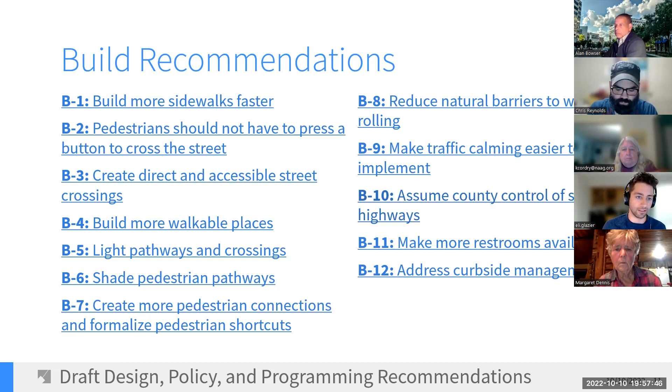So I think it's a good government measure, and it would really improve our ability to be responsive as a county to improving pedestrian safety in these areas. So I'm going to keep going, we can definitely talk about that later.

The maintain recommendations, MA1, is about being more proactive about fixing sidewalks, creating a county-wide sidewalk inspection and repair approach that proactively assesses sidewalks across the county on a rotating basis and then improves and repairs them based on the assessment findings. Being more proactive will help the county repair sidewalks before they deteriorate, allowing for cheaper repairs over time and a better pedestrian experience countywide.

MA2 is about a suite of recommendations for improving how our sidewalks are kept clear of snow, trash receptacles, overgrowth, and other things like that. MA3 is about using utility construction - so when utilities are replacing power lines or cutting into the roadway - as opportunities to improve the pedestrian environment, whether that's widening sidewalks, restriping crosswalks, or things like that.

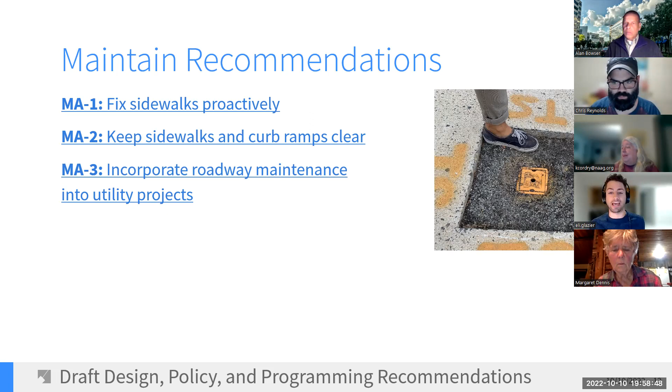Protect, this set of recommendations. The big recommendation here is really about how we grapple with an important element of the pedestrian safety crisis we're currently in, which is essentially large vehicles that have really poor pedestrian visibility - these tall trucks and SUVs.

P1 includes recommendations for the county to lead by example by not buying vehicles with demonstrated pedestrian safety issues, and by installing intelligent speed management software on county vehicles, so county employees are driving the speed limit and leading by example in that way.

In addition, there are recommendations here for additional driver education for people driving these larger vehicles, to help mitigate some of the design flaws that these vehicles have. There's also a recommendation to improve the education component of the driver's license renewal process, so drivers can get up to date on changes to traffic laws and other things like bike lanes and signals that may have changed since their last license renewal - just so people are getting that continual driver education.

P6 is about making the walk to school safer. This involves a few things: first, adding funding and locations for more school crossing guards along our busier roads, and funding what are called walking school buses - which you can think of as chaperoned walking, having adults, parents of kids, walk with a group of kids to get to and from school safely.

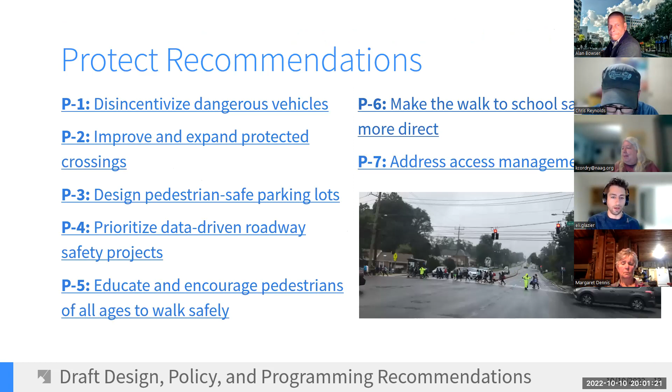Expand access. These recommendations are under a general accessibility theme. I think the low-hanging fruit here is EA1, to reduce street tripping hazards and make sure our sidewalks and other surfaces are safe and smooth to walk and roll on.

What we heard from a lot of community members was this was a particular issue for brick sidewalks. So making sure that brick sidewalks especially, but all sidewalks really, can be smoothly traversed by people of all ages and abilities using wheelchairs, or blind pedestrians.

A tag-along recommendation to that is EA2, to remove sidewalk obstructions, which is about getting things like utility poles and traffic signal boxes out of the sidewalk so there's more room for people to walk and roll.

EA4 is about making sure that the pedestrian push buttons that are all across the county, which in some places give you the signal to cross the street if you press it, and in other places help provide people with low or no vision some wayfinding to help guide them across the street.

In many parts of the county, these signals are actually located in places that may be difficult for blind people to use them. So making sure they're located in places where these groups can actually use them is really important. And then there's some other recommendations about working with Montgomery Parks to provide more park experiences.

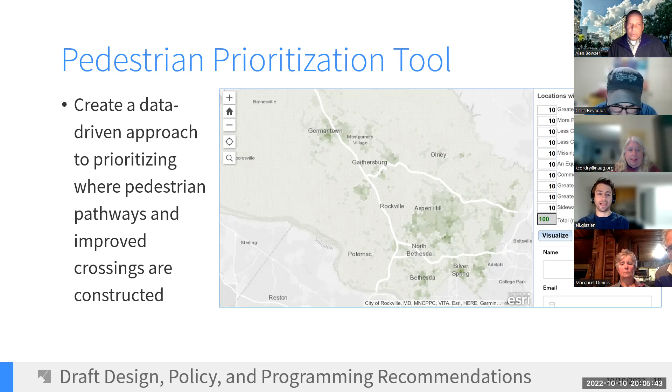Is looking to prioritize locations for these pedestrian capital projects. We recently released a tool we're calling the Pedestrian Prioritization Tool, which will help us create this data-driven approach to prioritizing where pedestrian pathways and improved crossings should be built.

Essentially, on the screen you can see there's a map, and on the right sidebar there's a list of 10 factors: places with greater pedestrian activity, places with more pedestrian crashes, places that have less comfortable pedestrian pathways, less comfortable pedestrian crossings, places with missing sidewalks, equity areas, commercial areas, areas that provide greater school access, areas that provide greater transit access, and areas that have sidewalks in poor condition.

And essentially what you can do is you get 100 points and you can allocate those points based on what types of places you want this money invested in, across these 10 variables.

And then if you click visualize after you've spent your 100 points, the map on the left will show you where the funding would be targeted based on the priorities that you've identified.

So you essentially review the factors, assign points to each factor, click visualize, and then at the bottom of the screen, which is a little bit cut off, you can click submit prioritization and share that with the planning department, which will help us develop a plan prioritization that we can bring forward and use to guide the capital budget and things like that in the years ahead.

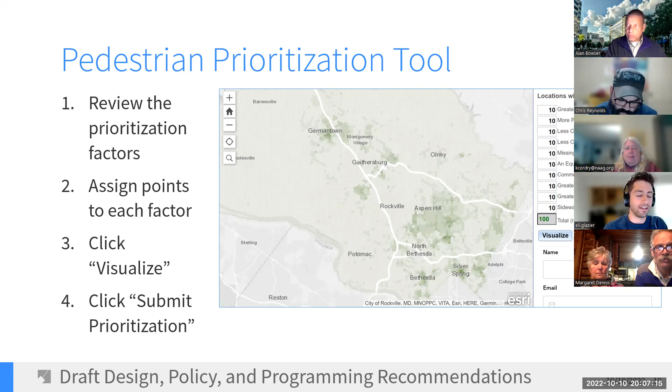All of the things I've talked about, including the prioritization tool, are available on our website at www.montgomeryplanning.org/walking. I'd encourage you to review all of the design, policy, and programming recommendations and their key actions, and you can share your perspectives with us. All the key actions have a rationale and more information about the responsible implementing agency and what goals of the plan each recommendation addresses—that's all on the website, along with the pedestrian prioritization tool.

This is our timeline moving forward. We've done community engagement through the end of the summer. We presented these draft recommendations to the planning board for feedback on September 22nd, and we're continuing community engagement through the end of the year. I'm also writing the plan at the moment, with a lot of the text subject to change based on community feedback. We're hoping to begin work sessions with the planning board after a public hearing in the middle of January, early 2023.

So that's a lot. There's an index here essentially of all the recommendations. I see there's a bunch of stuff in the chat—Alan, do you want to moderate this, or how do you want to proceed? I'm going to ask Jacquie to moderate it because she does such a wonderful job.

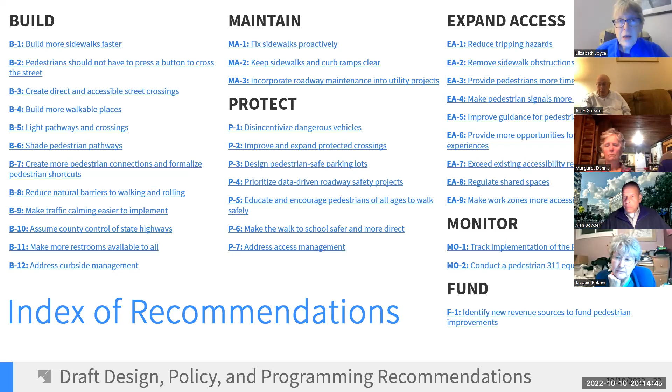Liz Joyce? You're muted. You're still muted, Liz. There you go. Thank you for this great presentation. I wanted to ask Jason, Ellen's point about surveys regarding Thrive is really important. Have you done statistically significant surveys to get a sense of what residents understand about Thrive? Because I assume no, but I don't want to say that hasn't happened without getting your input.

Yeah, I need to check on that, to be honest with you. I wasn't actively engaged in the Thrive outreach effort, but I'll drop a link to the outreach and engagement appendix that I was actually taking a look at just now, that we've posted on our website, that talks about all the different outreach and engagement efforts we did undertake. I know there was a survey. I don't think it was pushed out, the one I'm thinking of, through a postcard effort, the way the pedestrian master plan one was. But there have been a number of similar efforts.

I would also add, I think there was a fairly recent Data for Progress poll that went out about Thrive. That may provide some of the insights you're seeking, I think, from a planning department survey. I think we've learned a lot through the pedestrian plan engagement process that we're hoping to move forward with and sort of institutionalize in our planning efforts, particularly at the countywide level, where it can be so challenging. There's obviously larger engagement challenges when dealing with the county as a whole, and we think a survey may be an appropriate approach to reach more people and get perspectives from across the county.

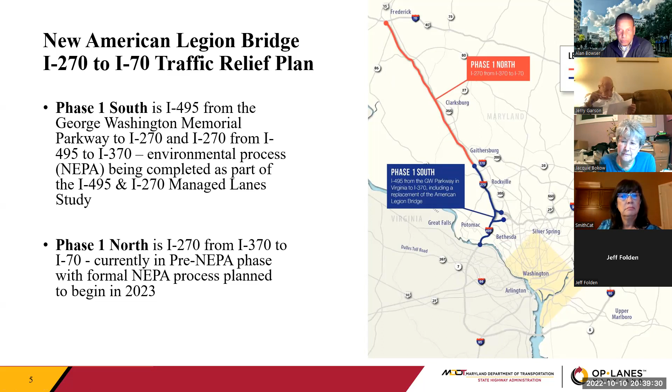Some key benefits of Phase 1. Well, first and foremost, the private financing we get will help us replace the American Legion Bridge and improve existing pavement and bridges within the corridor. And that's about a $1.2 billion estimated savings to the state.

The overall project costs between $3.75 and $4.25 billion. But of that, about $1.2 billion, or 30 to 35%, is going to replace the existing American Legion Bridge and also upgrade existing bridges and pavements within the section that would have to be done in the next decade regardless of this project. So it's a direct savings to our Transportation Trust Fund, and that will allow that $1.2 billion, instead of going to state of good repair in this corridor, to be used for other transit and highway improvements throughout Maryland.

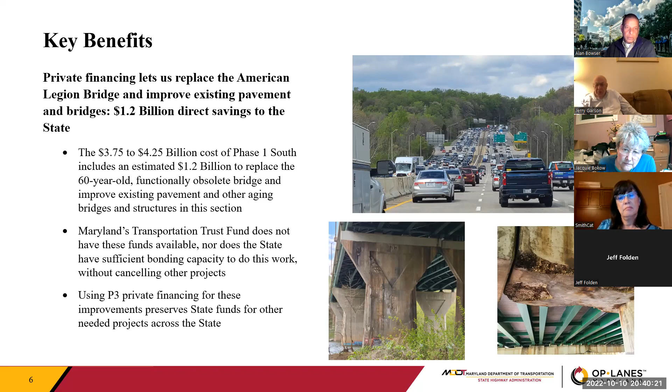Another key benefit is reducing congestion in the corridor. Just replacing the American Legion Bridge alone will not reduce congestion, but the provision of a new high occupancy toll, or hot lanes, which are proposed under Phase 1 South, will actually reduce system-wide delay over the corridor of the managed lane study by up to 38% in the PM peak. And also off the highway system, off the interstate, it'll reduce congestion on the Montgomery County arterial roadway system about 5%. So by using this private funding to do this, we can provide traffic relief.

Also, these private funds will bring billions in economic investment into the state of Maryland and boost our regional economic activity. A study from George Mason University estimates that there'll be a $12.6 billion boost to regional economic activity from Phase 1, and that includes about 43,000 new job years of employment over the entirety of Phase 1.

Additionally, the public-private partnership and private funding will provide new funding for Montgomery County transit priorities. That includes $60 million planned to design the Maryland 355 Flash BRT, another $250 million in capital improvements to the Shady Grove Metro and Westfield Montgomery Mall Transit Center to provide bus bays and increase parking, and also to construct the Metropolitan Grove Bus and Operations Maintenance Facility, which is going to support transit in the region. And then an additional $300 million over the operating term of the public-private partnership, which will support priority transit improvements across Montgomery County.

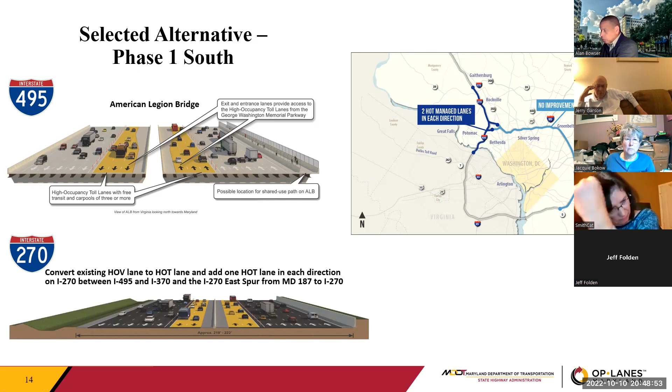Throughout the corridor, there will be different access points to the HOT lanes. The letters in purple represent interchanges where you may enter the HOT lanes. The orange locations show where you can transition between the general purpose lanes and the HOT lanes. You can also get in and out of the HOT lanes at the beginning of the system, north of 370 or west of Maryland 187.

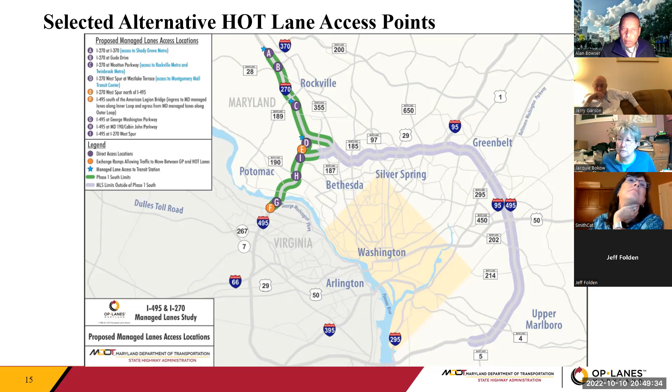The selected alternative improves travel speeds in all the improved segments of 495. Whether you're traveling in the general purpose lanes or the HOT lanes in 2045, in the morning or evening peak, you'll see improvement in travel times. There is one section with only a slight improvement of about a mile per hour in general purpose lanes, on the inner loop in the evening peak from George Washington Memorial Parkway to 270. As mentioned, there are no improvements proposed to the top side of the Beltway under this plan, and by not improving that section, traffic that today backs up on the top side near the I-270 West Spur during the PM peak will just continue to back up further in the future. Until we address that separately from this project, we won't see significant improvement in that section.

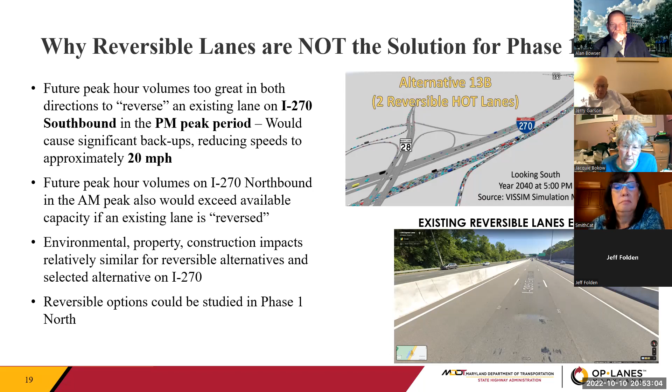Next slide, please. So Jeff, right here, this—see if I can... Okay, get, go ahead. Let me say what they are first before we hit play. Sure.

So on the left, we're going to show you a simulation of... no, sorry, I'm reversed here. On the left, we'll show the reversible lane alternative—what it would look like if we took an existing lane away and reversed it. This simulation was for 2040 traffic. On the right, we'll show our selected alternative, which includes just adding one lane in each direction on 270 and turning the existing high occupancy vehicle lane into a HOT lane. So if you can try to hit play on both at the same time, that'd be great.

They are giving me a hard time today. I got them to work earlier, but now in Zoom they're just not. Hit the down arrow on your computer twice, see if that works. One more time—hit what? Hit the down arrow, just see if it... this one? I'm not sure, I apologize. Technical difficulties. Okay, well let's just keep going. We can try to come back and maybe I'll try to share here at the end. Okay, sorry about that.

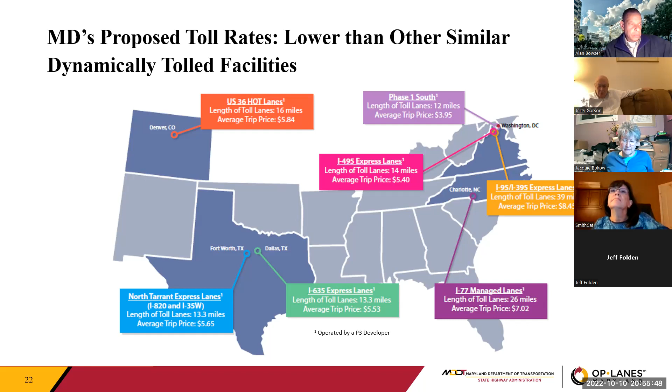But it's also important to note that these lanes aren't meant to be used by most people every day. They're really to be used when you have a critical trip and somewhere you need to be, like getting to a child's event or a doctor's appointment. We do see in Virginia that the vast majority of customers who use these lanes spend less than $20 per month. So they're there for when you need them. Next slide, please.

We are delivering this as a public-private partnership, different from the Purple Line though, we're using what's called a progressive P3. Under progressive P3, we solicit early in the process for a partner we call our phase developer, and then we work collaboratively with the phase developer and all of our stakeholders in further developing the project.

Which we've been doing since we awarded the pre-development work contract last year, about August of last year. Once the pre-development work is completed, the phase developer will submit to us a proposal covering final design, construction, financing, operation, and maintenance for phase 1 south. Once that's done, we would work it through the approval process, including the Maryland Transportation Authority Board and the Board of Public Works. If approved, we'd move forward with final design, construction, financing, operation, and maintenance for phase 1 south, and a similar process will be followed for phase 1 north under this same contract.

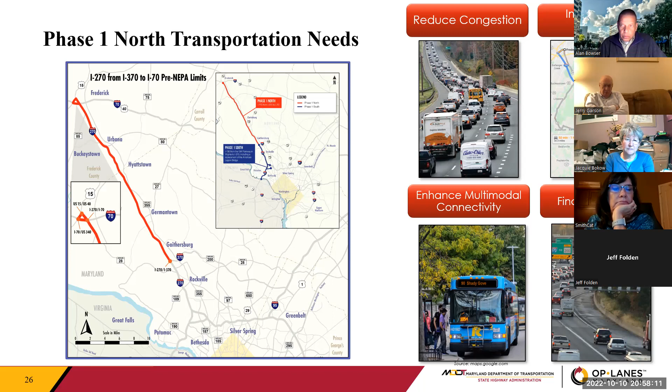Next slide, please. So that's our update for now. We can take some questions in a second.

Hey Kathy, before we do, can you stop sharing this? I'm going to try to share my screen, see if I can play the reverse. There you go. See if you can get it to show. Can you see my screen? Yes, we can. All right, so on the left, let's see if this works.

On the left's the reversible lane alternative, which would reverse an existing lane, so no new lanes would be added and an existing lane would be reversed. This is in 2040, looking south from Maryland 28. On the right would be a simulation model of the selected alternative where we would add one lane each direction and convert the high-occupancy vehicle lane to a high-occupancy toll lane. So hopefully this works.

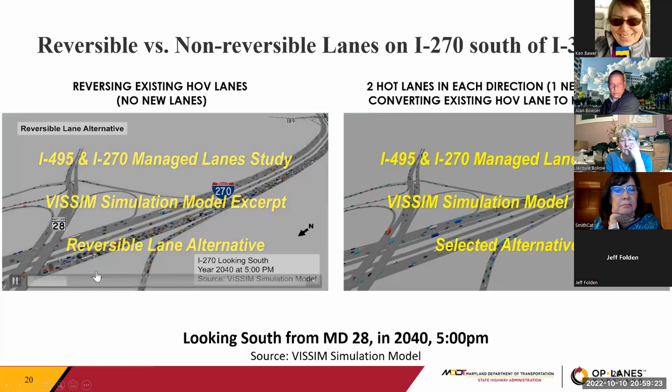So you can see the significant backups on the left side when you're reversing the existing lane. On the right side, you can see the traffic is free flow. This is PM peak, so what you see is sometimes traffic from 3 to 4, 5.

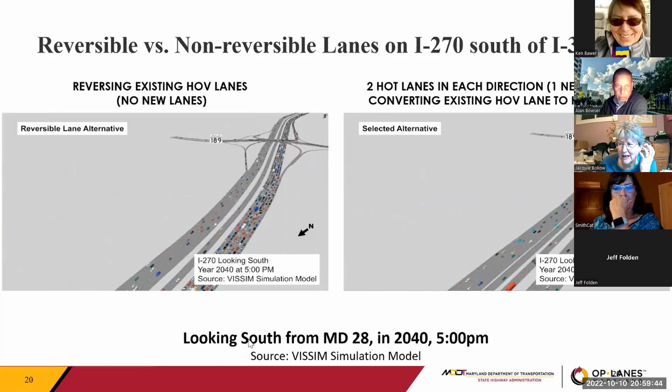Jeff, you've become unintelligible, your voice is not coming through. I'm sorry, can you hear me now? Yeah, it wasn't working with the video when the videos were running. I think it was draining your bandwidth. Sorry about that, I don't think I can talk and do it at the same time.

On the left you could see the significant backups. What I was trying to say was by reversing a lane between 3 and 4, and 4 to 5, you don't have capacity to move the traffic you need during those hours, so the traffic continues to back up and grow, which is what you see at that 5 o'clock condition. But when you have the capacity in the selected alternative, that doesn't occur, so you don't get those significant backups.

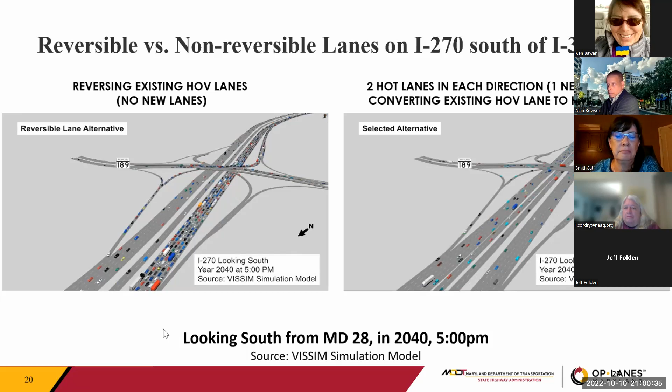This is Jerry Garson. I want to thank you for giving an excellent presentation. One question I've got from a number of people is, will there be tow trucks, including heavy duty ones, assigned to the areas when construction starts? Because once construction starts, a lot of people start slowing down just to look at the construction and maybe even put some screening to block some of the construction work from people, because whenever they see it, they slow down.

Mr. Garson, we'll have to go look into that one. I'm not sure, we haven't got to that level of detail, but we've got an operations and maintenance manager developing an O&M plan and a traffic control plan during construction. So let me take that back to our team and let's see what we can do about that. Thank you.

Ken Bawer, you had a question?

Yes, thank you. This is, I think, the second or third presentation of this kind that I've heard, and it's kind of the same dog and pony show. Everything's wonderful, this is a great project, what could possibly go wrong? So let me just throw out a couple things. One is the late great Ron Kirby, who was the head of the COG Transportation Planning Board, routinely would say, 'We just can't build ourselves out of gridlock.'

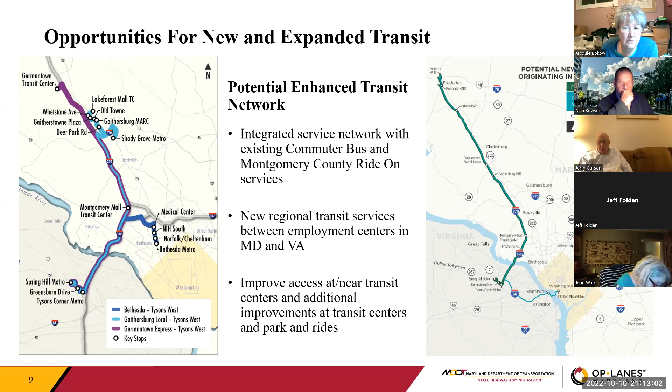That might be this previous slide. If you go back one, that's 355 BRT. That's the county project that's using these funds to design it. Okay, so that's not on 270. Correct, that's 355. Okay, thank you.

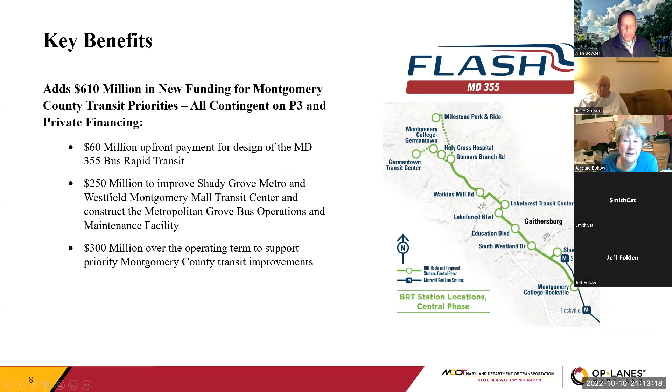But that does mean that a large part of Montgomery County's BRT system is contingent on this project going forward in the way that you would like it to go forward. Is that correct? The funding we're providing is contingent upon that. Yes, that's correct.

Okay, who else has questions for our friends at State Highway?

I think we may want to have another presentation because it is very complicated, especially the relationships between what the state wants to do on I-270 and the impacts on the neighborhoods. I know there are people concerned about being able to get access onto the managed toll lanes, and some of us have questions about its impact on the environment. Can you just make a statement—we're looking at the slide, not the reversible lane slide, but the managed toll lane slide. What does it do to the footprint of I-270? How much is 270's width expanded with this project?

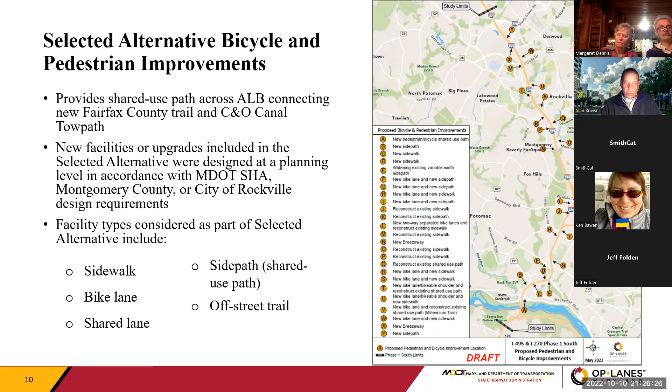Ken, was that a good answer for you? No, but continue. Everything's great, right?

Peggy, you have your hand up. Do you have another question? Which we'll hear when you unmute. Can you hear me now?

Yes. Given the interest in the environmental community on preserving existing trees, particularly mature ones, how many trees are going to have to be removed to make this happen with the expanded lanes and presumably expanded right-of-way along the sides?

Let's see, I'm looking at our slide 18. The forest canopy is reduced by 455 acres. But how many trees is that? There's no way to calculate that. So nobody's gone out and counted the trees and their diameters and measured the actual measurable impact of this? We do permitting in acres, not in numbers of trees. That's the way it's done. Oh my.